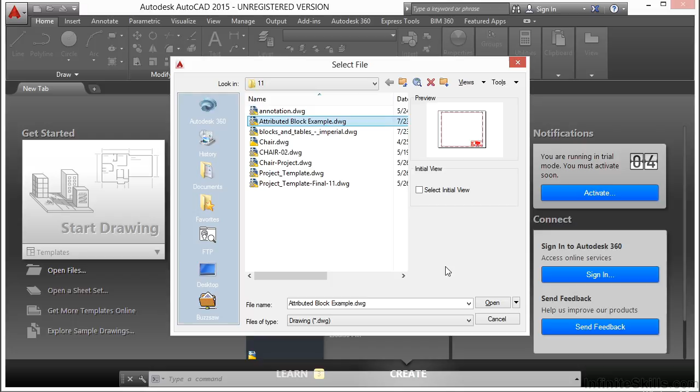This file contains an attributed block that has been inserted as a title block for this drawing. It's right here. So you can see when I hover over it, it looks like it's a block. When I select it, there are a lot of different grips in here. That's for the attributed text. This item here that says prepared for, that's just regular text. I can't edit it or change it or do anything to it.

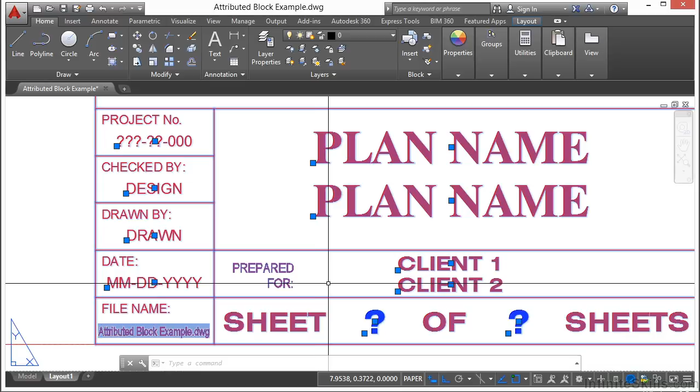Now to edit the attributes of a block, you can double click it. That brings up the Enhanced Attribute Editor window. Here you can edit the text to display what you need it to. We drag this to the side. Here you can see this attribute has a tag. It's called plan, and you're prompted with a plan name number 1 and the value. Plan name or value here is the actual text that is displayed in your drawing.

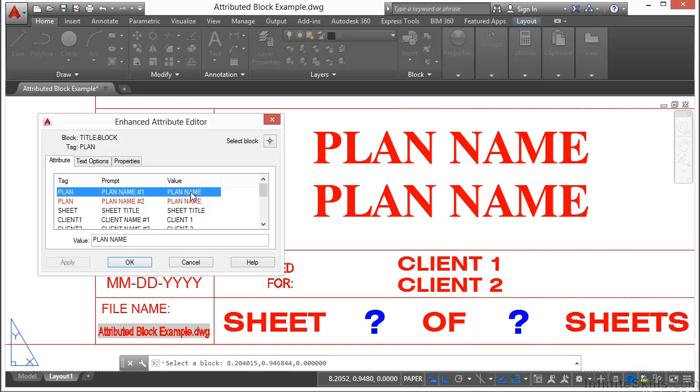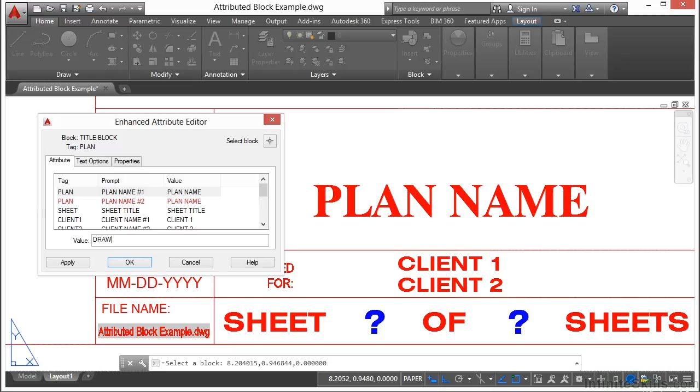To edit that, I click in this box here, and I just change it like I would in any regular text editor. I'm going to call this drawing title. When you're finished, click OK, and you've changed the text in your title block. Title blocks are very commonly used with attributed text. This allows everyone's title block to be formatted exactly the same way and give your drawings a uniform look.

Now here's a quick tip. If you only want to edit one field of data, hold down the Control key and double click on that text field. When you're finished, just left click somewhere off on the screen. Now if you double click it, this gives you access to everything here that you can change.

I can call this sheet title as an example, which is right up here. I can say whatever I want it to be. When I'm done, press enter. Client name, I can just say ABC Company. Click OK, and you can see here that I've changed some of the information on it. Now let's say, for example, I only need one of these lines. That's easy enough. Put a space in there, and now it looks blank.

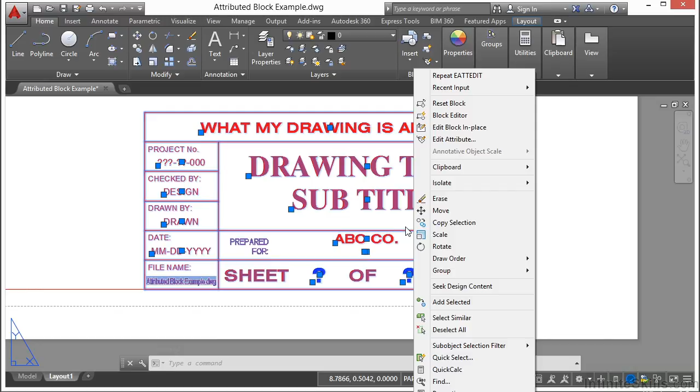Now to create an attribute in a block, you have to create an attribute definition. It's sort of like creating text, only there are a few more definitions to assign. So let's edit this block right here. So select it, and then right click on it, and go to the block editor. I'm going to close this because we won't really need that. It's just going to get in our way. Each one of these objects here are attributed text. If I double click on them to edit them, I get these three options.

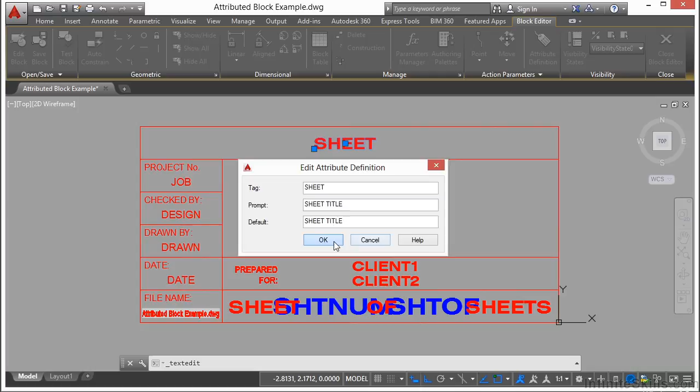I have the tag, the prompt, and the default. The default will automatically fill in this information for you so the user doesn't have to. It's sort of a placeholder. When you're finished, just click OK. Now these have grips so that I can position them however I'd like.

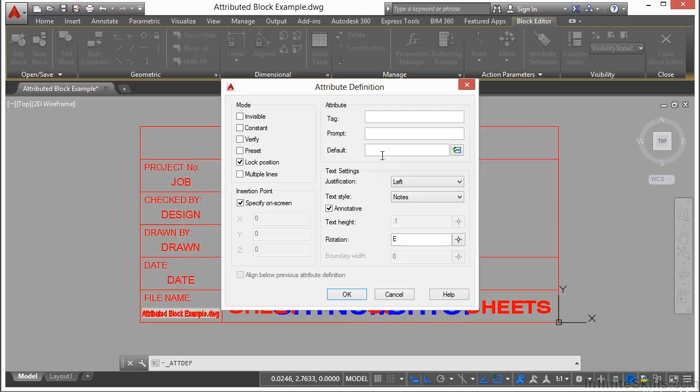And if I want to create a new block attribute, I just come up here to the attribute definition in our block editor ribbon. So this is the attribute definition. I have a lot of different items that I can pick from here, like justification, text style. I can make it annotative or not. I can change the text height. Mostly what you're going to do is enter in your tag, prompt, and your default information.

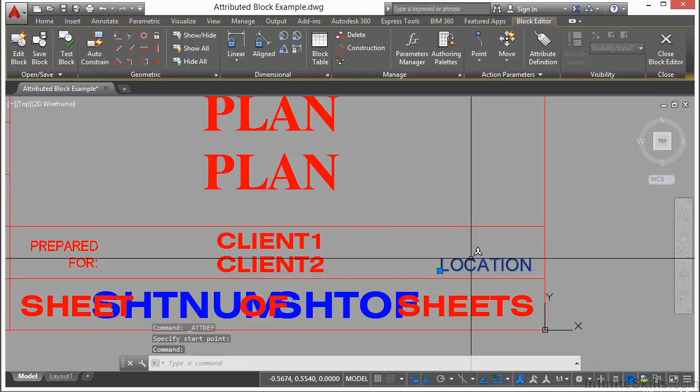So let's say I want to make a tag for location. Now a lot of times you're just going to enter in the same thing, location, location, location. Now when I click OK, it wants to know where I want to put it. I don't really have a spot for it in my line work. I'm just going to put it right over here, just for now. And that's where it is. Now you can also look at things like layer, size, etc.

Now let's select any attribute. I'm just going to pick the one that I just created. Right click on it and select the attribute order option right here at the top. Now this window opens up the attribute order window. This will allow you to edit the order the attributes will be listed when you edit the data fields of an attributed block. Now, it doesn't physically change them in any way, just the order in which they're listed.

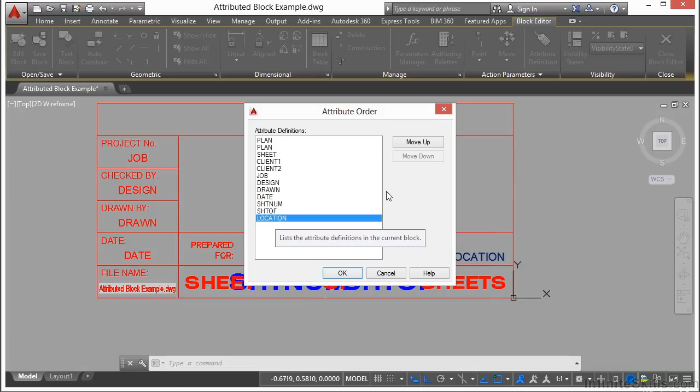So I put in location last, so it naturally goes to the bottom. But let's move it up after the client names. So I'm going to put it up here. So I select it, and then I click the Move Up button. Click OK. And when I'm finished, I'll click the Close Block Editor button. Save the changes to the title block, and you'll notice it doesn't look any different. Where is my location option?

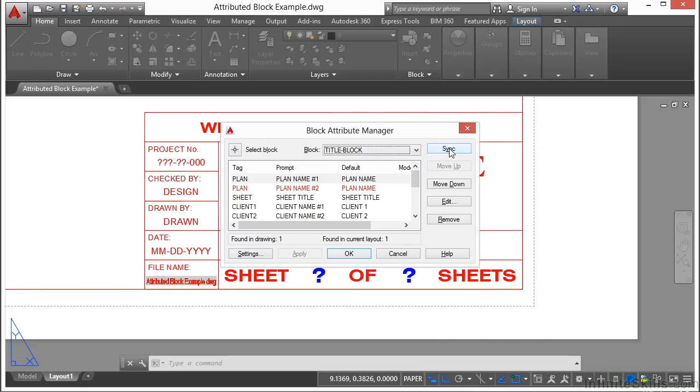Well, there's something that you have to do when you edit an attributed block. You have to use a command called Batman. No, I'm not making it up. It's BATTMAN. It stands for Block Attribute Manager, or Batman. Once you open up Batman, find the block that you just changed, that's title block, and then click the Sync button. And that will update every instance of the attributed block in your file.

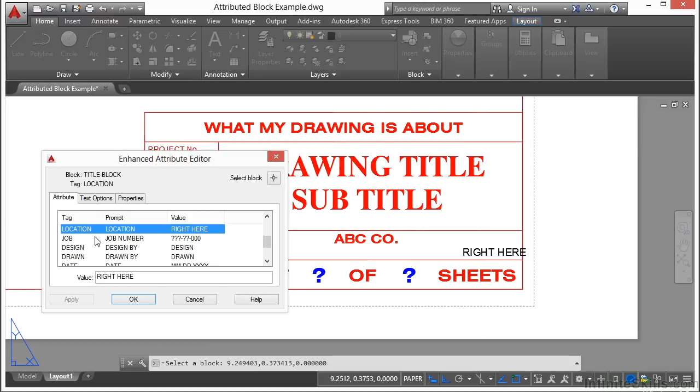Now, I would wish that it would do this automatically for you, but it doesn't. So you have to do that every time. Don't worry, it will be there. Now we can edit our location right here. Now, if something like this happens in your attributed text, just double click on your attributed block, find the tag that you want to change, go to Text Options, and you have some abilities here to change a few things.

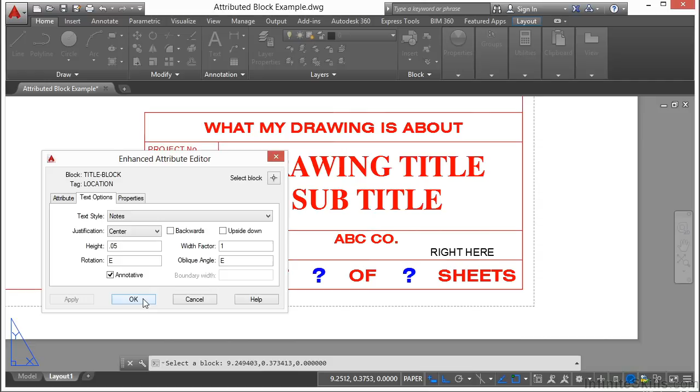You can change the justification, and that might move it. You can change the text height. You can even change the rotation. You can make it annotative or not. You can even change the width factor. There are a lot of times when I've shrunk the height inside something just to make it fit better. It happens. You can also change some of the properties of it right here as well. When you're finished, click Apply and OK. So that's attributed blocks. And a very common use of an attributed block is a title block.